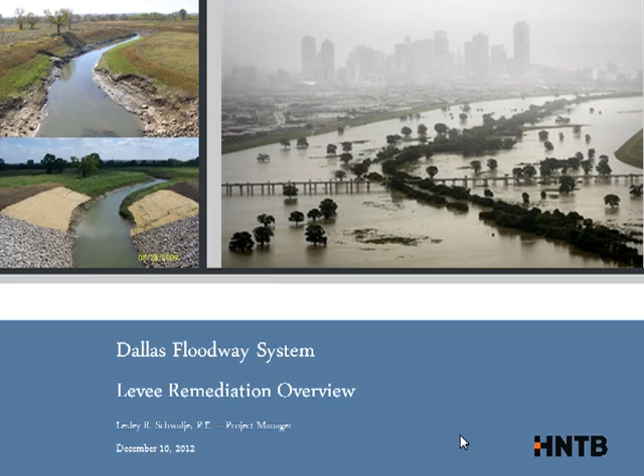I'm going to start out. I know a lot of you have probably seen or heard the city give presentations on their balanced vision plan and their Trinity River Corridor project, but I just want to give you guys a quick overview. There's a lot more to what's going on in the Trinity River than just the levee remediation.

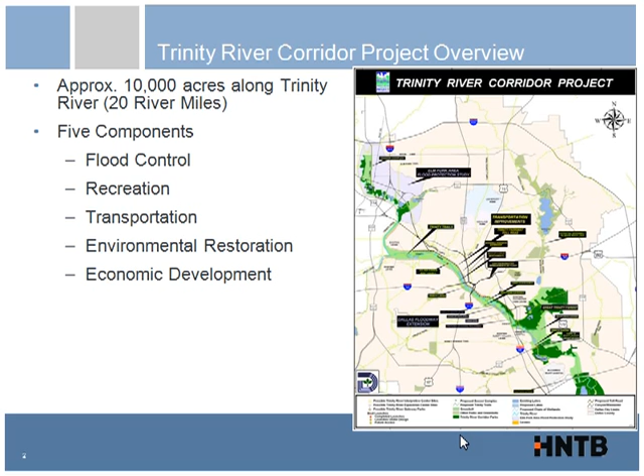The Trinity River project is broken into 5 components: flood control, recreation, transportation, environmental restoration, and economic development. I'm going to expand on those just a little bit.

Some of the projects that are going on that are related to flood control, as I'm here to talk about today, the 100-year remediation. And then I also just want to clarify, there's also what you're going to hear referred to as the Dallas Floodway Project, which is a joint project between the city and the Corps to look at these same levees, but they're looking at them to the full capacity of the system.

The levees are about 30 feet tall. The 100-year only goes about halfway up those levees. And so the Corps and the city are working together on an authorized project called the Dallas Floodway Project for that.

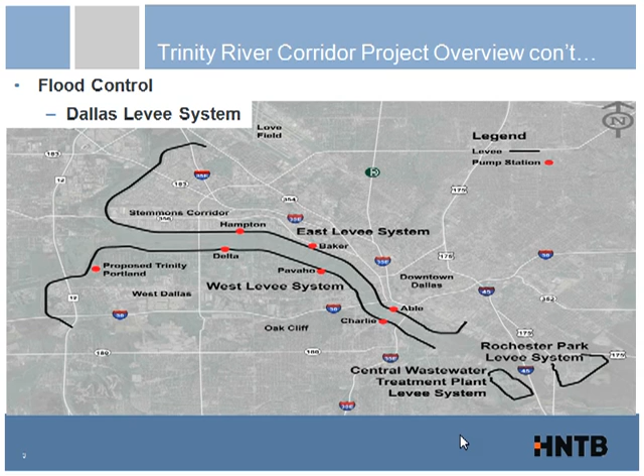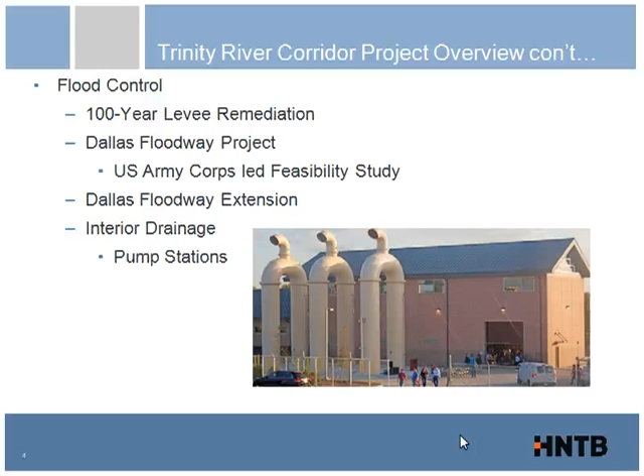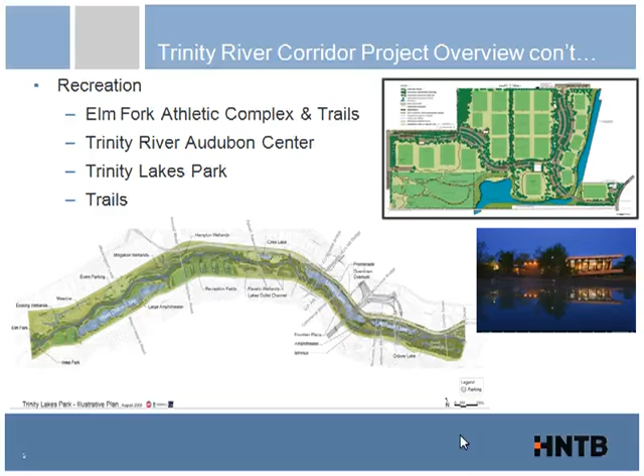The other components of the Trinity River project, I'm not going to get into nearly as much because flood control is what's near and dear to my heart. But you do have recreation. These are just some ongoing projects with lakes, trails, the Audubon Center, and things like that along and within the levees and the river.

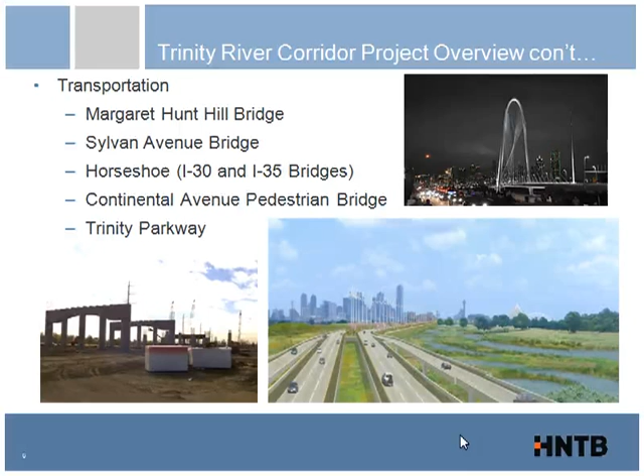I think a lot of you are familiar with the transportation projects. The Margaret Hunt Hill Bridge, which we all know is now open to traffic. There's also some ongoing construction on Sylvan, and then other projects that are in the planning stages for transportation functions within the river.

The last 2 pieces of the Trinity River Corridor project are environmental restoration and economic development. The environmental restoration includes the Trinity Forest, wetlands, things like that, that are being restored and improved within the system. And then, as with any improvement project, economic development is what we hope and are seeing coming following improvements that are being made to the system.

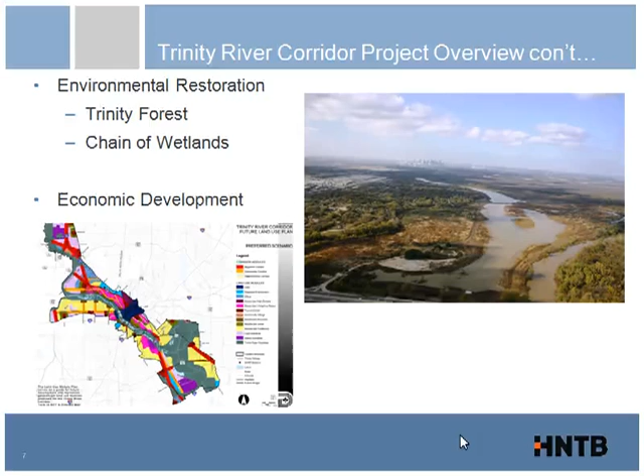So now jumping to the levees, which is where my heart is. I'm going to give you just a little bit of background on the levees and how we got here and where we are with the levee systems.

Back in 1908, the city of Dallas saw the worst flood they'd seen to that point, which is what initiated the building of levees in the city of Dallas in the first place. In 1908, there were no upstream reservoirs. When the rain came, the floodwaters came and just wound through the city, and there was a lot of destruction. So in the 1930s, the construction of the original levees began.

In addition to constructing levees, they also relocated the river channel to where you know it as being today. The river used to just wind up and down through downtown Dallas. Those levees were designed to withstand 2.5 times the capacity of the 1908 flood at that time in the 30s. In the 1950s, being completed by 1960, is when the Corps got involved with the levees.

There was a project in the 50s where they actually raised and strengthened the levee system to what we see out there today. At that time, the levees also became part of the federal flood protection system. The capacity at that time was approximately an 800-year storm event based on 1960 design.

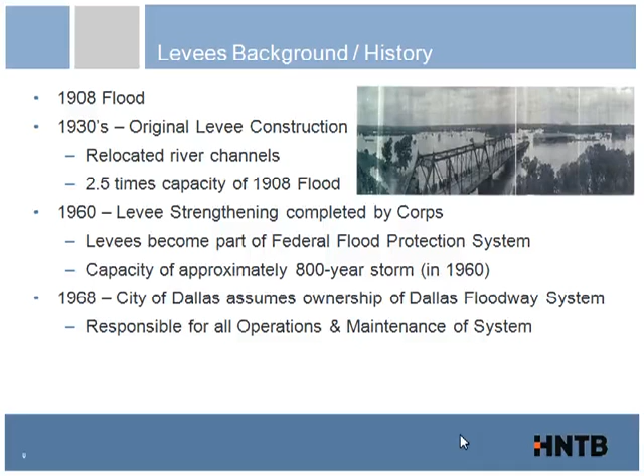In 1968, the city of Dallas assumed ownership of the Dallas floodway system, and what that really means is the city of Dallas took over the operations and maintenance of the levees. The levees were then, and are still today, part of the federal protection system, and the city does have federal assistance when it comes to their levees.

In 1990, some of you may remember this, before I was in the city of Dallas, but in 1990 the largest flood that the city has ever seen occurred. This actually surprises some people to know, this was actually only a 50-year storm event as it came through the Trinity River Channel.

The water peaked about 2 feet within the current 100-year water surface elevation, which is about halfway up the levee. So contrary to what some of the things we've heard, these levees have never been tested to the full height. There's never been water to the top of these levees. Just under halfway up is all the water we've ever seen on this system.

In 2007, Congress passed the Water Resources Development Act, which authorized federal participation in the Dallas Floodway Project. This created a partnership with the city and the Corps to improve the levees for flood risk management, but also to include the Balanced Vision Plan and have the Corps participate and approve the lakes, the trails, the parkway, things along those lines.

Then in December 2007, the Corps conducted periodic inspection number 9. Periodic inspections on levee systems all over the country are scheduled to happen every 5 years. They do an annual inspection every year, but the periodic inspection is a little bit more detailed.

Shortly before the periodic inspection in 2007, we're all aware of what happened in New Orleans with Hurricane Katrina. Following Hurricane Katrina, the Corps stepped back and took a look at the way they rate their levee systems, how they assess them with their periodic inspections, and developed standardized criteria and a template that all levees are measured against. The city of Dallas was lucky enough to be one of the first cities that had a periodic inspection done following Hurricane Katrina.

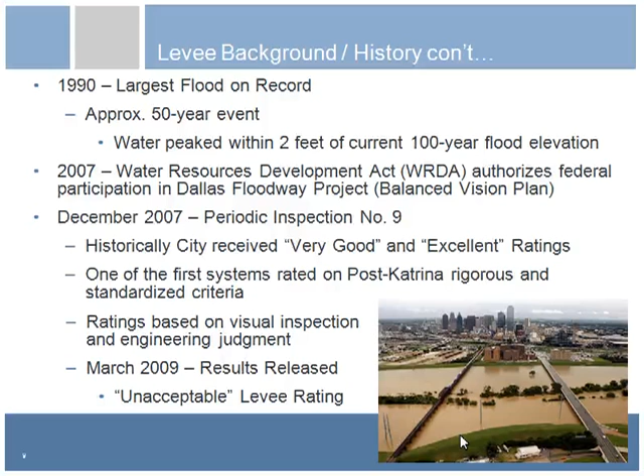So now, what does the unacceptable rating mean? The periodic inspection itself identified a list of deficiencies of things that were noted as being wrong or not up to standards with the levee system. Those deficiencies can be separated into two categories.

Operations and maintenance, which I mentioned before is the city's responsibility since 1968. These items included things like erosion of slopes, vegetation - we had trees growing too close to the levee system, structural damage such as a cracked facade on a pump station building, or concrete spalling at one of the head walls of an outfall channel, and then channel instability, which is similar to erosion, where at the outfall channels we had some eroding from the water coming through.

The other type of deficiency identified at that time were what we've been calling system design deficiencies, which are both the city and Corps responsibility. What they've done is roll all those deficiencies up into that Dallas Floodway Project, so those are being reviewed as part of the overall big picture of the levee system that the Corps and the city are currently actively engaged in looking at.

Things that fell into that category would be like levee height. Levees settle over time, so the levee was not up to the original design grade. Slope stability, where we're having levee slides, encroachments - and this was a big one for the city of Dallas because all of the bridges that cross the Trinity River are considered encroachments, some of which even the deck of the bridge is lower than your levee height. So they're really encroaching on the levee. And then under-seepage, which I'm going to get into a lot more later.

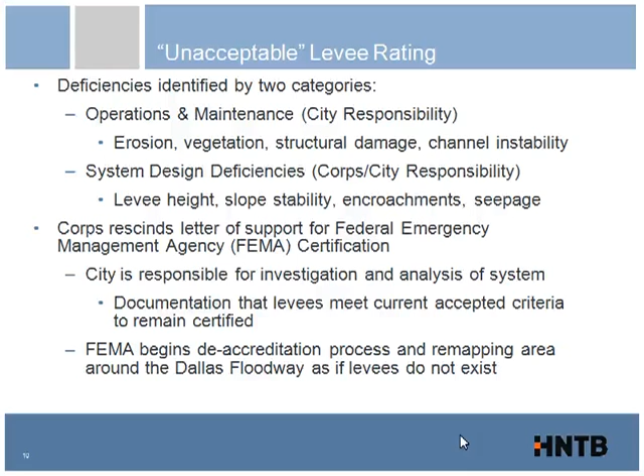And what they do when they do that is they start looking at remapping their floodplain insurance maps. In a case like this, which was happening all over the country, they're mapping the system as if the levees don't exist at all. And I have a map coming up that'll show you the repercussions of that.

Just to get into a little more detail, as soon as the city got their letter and knew that their levees were uncertified, they started working on what's called a maintenance deficiency correction period plan. What that does is take all those O&M deficiencies and essentially put together a plan, a schedule, a list of what they were going to do to resolve them. They worked with the Corps and got that approved in June 2009.

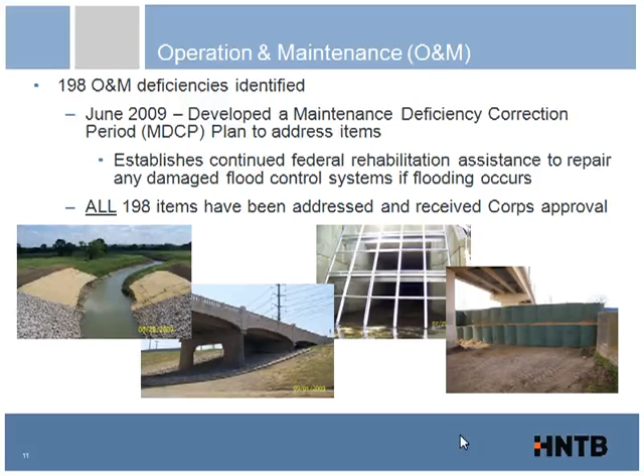What that meant was, while the city was trying to get everything resolved with their levees, if we'd had some sort of flood event and some sort of damage to one of the flood control structures, be it the levee or a pump station or whatnot, the Corps would still have come in and helped the city, despite their status of having an unacceptable levee, to repair as necessary. I also want to point out that since 2009, all of the 198 items have been addressed by the city and approved by the Corps, so the city is sitting in real good shape with that right now.

As far as the system design deficiencies, I don't want to spend much time on this - these are all rolling into that Corps feasibility study. In that study, the Corps is looking at not only what was identified as being wrong in periodic inspection number 9, but they're looking at any flood risk management improvements and then putting on top of that all of the plans the city has for the Trinity Lakes, the parks, the trails, and the parkway.

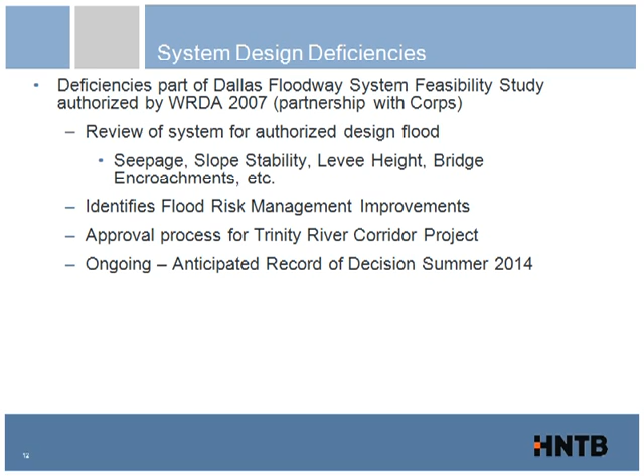When FEMA started their de-accreditation, it's actually supposed to be a 2-year process. What has happened since then is the city of Dallas was not the only municipality in the country in this position. A lot of levee systems were being rated unacceptable, and a lot of them weren't nearly as proactive as the city of Dallas and could not have resolved this.

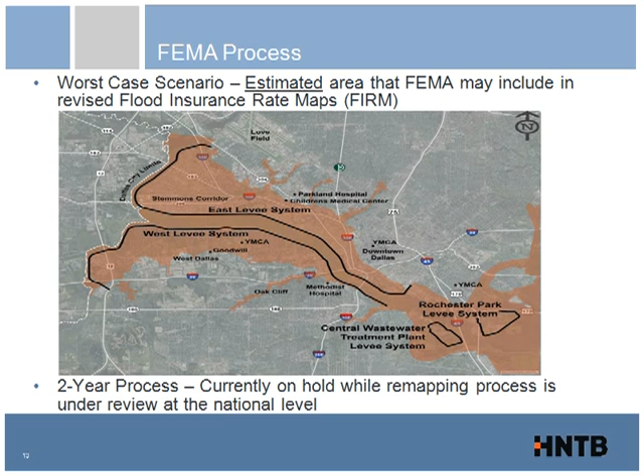So they went to Congress, and FEMA and Congress are working together on a new remapping process, because just taking the 11-mile east levee and saying the whole thing doesn't exist because of one flaw just isn't feasible. So FEMA's looking at their whole remapping process, and that is currently going on at the national level. FEMA is on hold right now as far as redrawing the maps, even within the city of Dallas.

So what did that mean to the city? Back in 2009, they immediately started investigating and trying to determine what actually needed to be done with their levees.

So the first thing we did was start with a massive soil investigation, which included looking at all the historic and recent borings, the parkway, the pump stations, all the bridges crossing. They'd all done a massive amount of soil investigation, and then HNTB supplemented it with additional borings where we felt we needed additional information. In the end, we actually ended up with almost 4,000 borings and cone penetrometer tests.

I'm not a geotech, so I'm not going to get into that, but it gave us detailed information about the soil on the system. It was 30 miles of levees that were looked at in that detail.

We also started looking at historic information, as-built drawings. As I said, these levees were originally constructed in the 20s and 30s. There's not a whole lot of as-built information on them, but we did have some information from the Corps improvements in the 60s, as well as on the pump stations and whatnot that were built.

We also did a very detailed investigation into the utilities. Some people would be surprised to hear there are more than 100 utilities that actually cross those levees out there, and a lot of them predate the levee construction itself, so there was not much information known. In some cases we were drilling our soil borings blind, not sure if we were in the vicinity of a utility or not. So there was a lot that went into that.

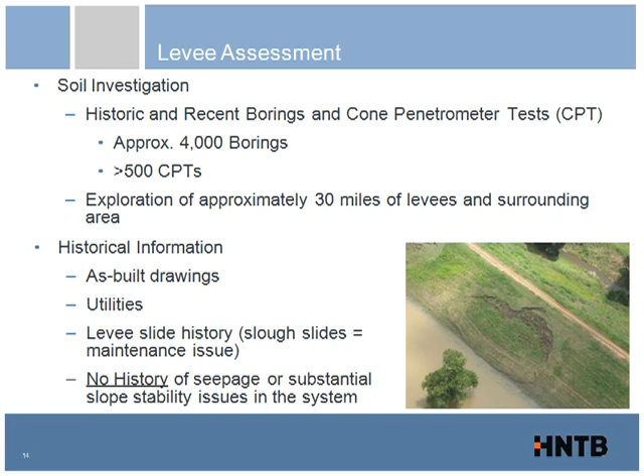I do want to point out that through all of our investigation, and everyone talking to people that we know have been here for a long time, there is actually no history of any seepage or substantial slope stability issues within the system, even during the 1990 flood. Historically, these levees have performed very, very well.

So, as we started gathering information, the first thing was to take a look at what potential problems we thought we saw out there. We started that very early in the process, so even before we'd done all the soil information and investigation, we took a look at the worst possible case of problems we could have out there—all the situations we had based on what we knew at that time.

That in turn went into what we called a levee remediation plan, where we identified potential remediation measures for all of those potential problems. Doing it that early gave the city, the Corps, and HNTB a good start on getting together to start talking through what remediation measures different groups would like to see.

What do we think the right path to head down as we get more information is going to be? Since those reports were developed about 2 years ago, we've been constantly getting additional information, all those borings, a hard ground survey, real good information about the system, and we've been refining the problem identification and the levee remediation.

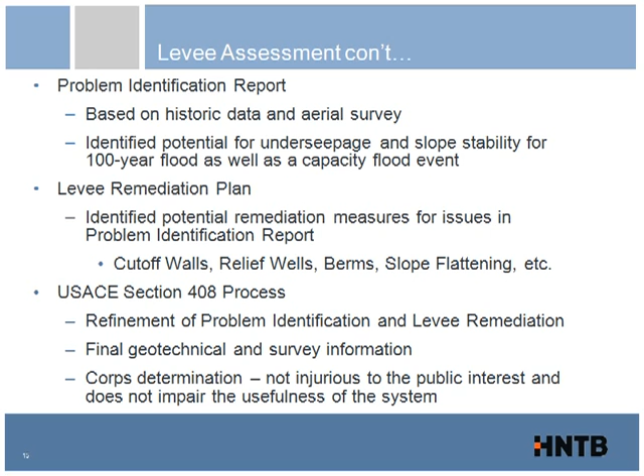Through that, the ultimate goal was to prepare a Section 408 proposal for the Corps. That's essentially putting together all the technical data in a report form, with a list of requirements, because ultimately what you're looking for on a federal system is a Corps determination that you can do construction or make improvements to your system without being injurious to the public interest and not impairing the usefulness of the system. So basically you're not sacrificing the flood control and not doing anything to harm the system that's out there today. We did get approval earlier this spring on our ultimate 408 package for the levee remediation.

What we determined through all that refinement was that we had about 3.5 miles of areas where there could be potential seepage issues at some point with a 100-year flood.

If you're not familiar with what I mean by seepage, hopefully you can see it on that cross-section. Essentially, we've got some potential sand layers down underneath the levee, and if you get enough water up there on your flood, you could create a path where the seepage could come through under the levee and blow out on the land side and create a problem. I'm oversimplifying it - all the geotechs in the room are probably cringing - but that's it in a nutshell.

You can see on the map the 3.5 miles of area that we were concerned about. There's about 3 miles on the upper east levee, and then there's a real small portion down at the south end of the west levee.

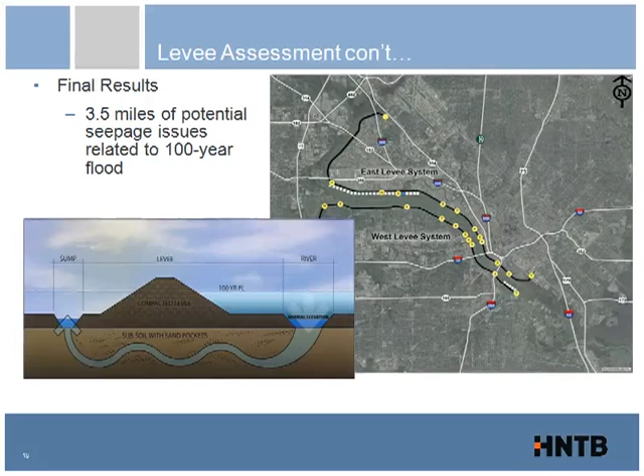Now I'm going to step back for just a minute, because some of you have heard recently in the news about the risk assessment that was done for the system, and that these levees may not be in as bad of shape as we originally thought, and that we can move forward.

The Corps did do a risk assessment as part of the Dallas floodway feasibility study. The Corps led it, the city participated. In the risk assessment, you're really looking at analyzing failure scenarios based on probability, not a black and white answer. So you're looking at it based on probability of the failure occurring and what those consequences are. Life safety is first and foremost in everyone's mind, so what are the consequences if we were to let something happen?

The results of that led to a couple of different things. First and foremost, it gave everyone a better understanding of the flood types that we experience. A lot of geotech modeling treats the water as if it's up there forever, but we learned through some of the modeling that's not realistic for what's going on here in Dallas. So they looked at shorter duration floods.

The other thing they really learned was that the levees are more resilient than originally evaluated. The opinion now of the levees is that they're a lot stronger than we thought at the end of periodic inspection number 9.

What you'll find with this risk assessment, and with most levee systems out there, is that your highest risk of failure is almost always going to be overtopping. It doesn't matter how high you build your levee, it could always be overtopped by some massive flood. This Corps has been updating hydraulic models through this process, in part because since these levees were originally built, they've built a lot of dams and reservoirs upstream, so they've been revising the modeling to incorporate some of that.

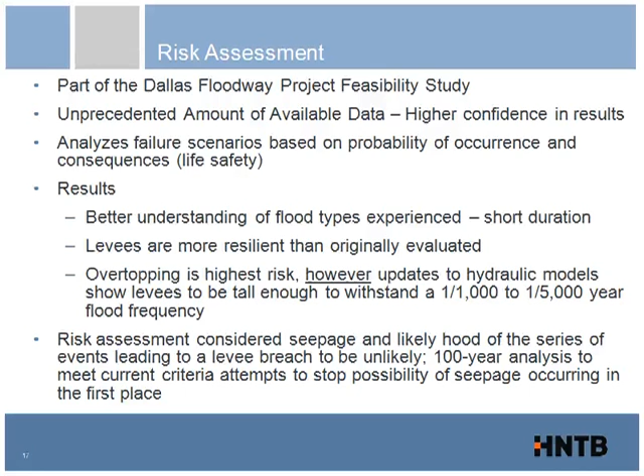Well, for the 100-year analysis and what we were required to do for FEMA, we had to stop that seepage from happening in the first place, because we have to be able to show on paper that there is no seepage issue out there, regardless of the chances of it actually leading to failure or a levee blowout or the consequences. Anyway, that's my side note.

Back to construction. What we ended up with through our coordination with the city and the Corps was that the best remediation for that 3.5 miles of under seepage was a cutoff wall.

Now, the cutoff walls that we chose to put in, we used a mix of soil bentonite and cement bentonite walls. I don't want to get too much into the difference between the two. Just the cement bentonite, you introduce cement instead of the native soil when you're mixing it in with bentonite. We specifically used cement bentonite on this project because we had to cross both of the Hampton outfall channels, and the cement bentonite sets up a lot quicker.

It's harder to construct, but it sets up a lot quicker, and that way we were able to quickly reopen the Hampton outfall channels in the event that we had a flood and they had to use the pump stations. We also used jet grout in select locations. I'll explain jet grout a little bit more later, but that was mostly to address utility crossings and construction under the bridges where we didn't have the clearance.

The cost of construction came in at approximately $10 million for that 3.5 miles, and construction did begin earlier this year in June and is ongoing. We anticipate it wrapping up here in the next month or so.

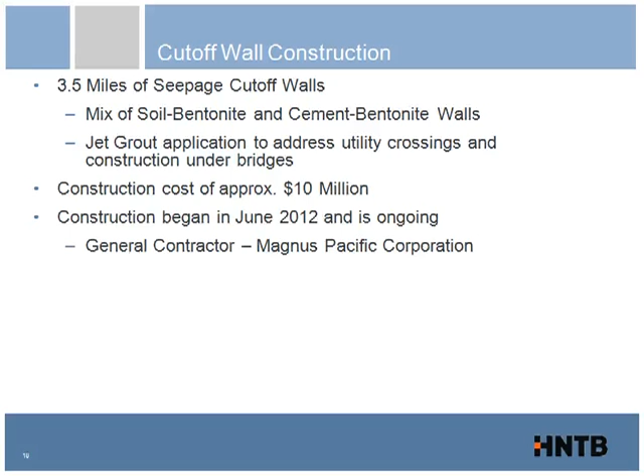Once the cutoff wall's in place, they put a clay cap up here at the top, and if you were to go out there, you could see it today because it's still an active construction site, but 6 months from now, you're not even going to know where those cutoff walls are. They're underground. The grass will be restored above them. We'll have markers out there, obviously, so flood control knows where they are, but they're completely underground and have no impact to the floodplain itself.

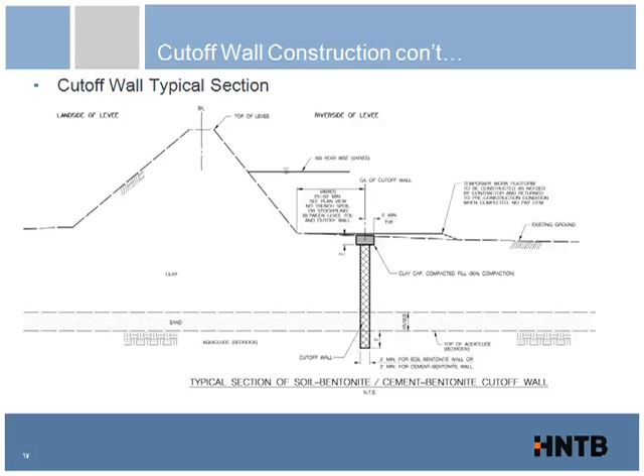All right, now I have some fun construction pictures that I'm going to try to explain.

This is the slurry bentonite pond that the contractor put in. The contractor did most of his staging near the Hampton pump station, which you can kind of see in the background. What they start with is this big slurry pond, essentially water pulled out of the city hydrants mixed with bentonite. They mix it to get the right mix design, testing every day, multiple times, for pH, viscosity, and most importantly, unit weight.

Once they've got the slurry as they want it in the pond, they start piping it up and over the levee, and in some cases up to 3 miles. You can kind of see a pipe right here. They had to pipe it along the toe of the levee to get it to where they were actually digging the cutoff wall.

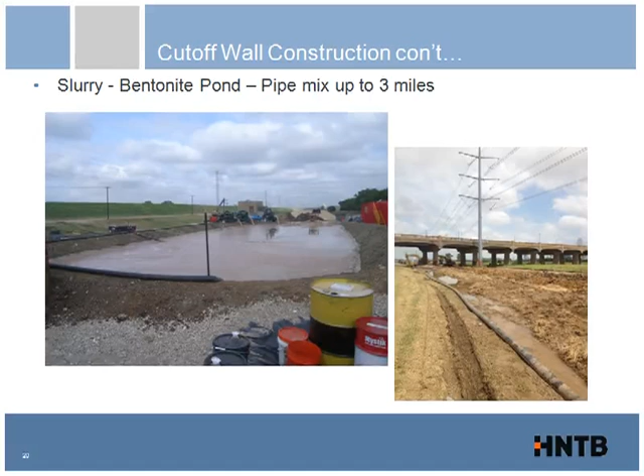Excavation of the cutoff wall takes some pretty big equipment. This is a long reach track hoe that can actually dig up to 84 feet deep, a trench 3 feet wide. In our application, we only needed to go up to 60 feet deep, so we had plenty of excess.

This is a picture of the bucket, and there's some teeth on that bucket, because like I pointed out on that typical section, you actually have to get your cutoff wall down into bedrock so that you're sure you cut off that sand layer. So they use those teeth to dig out the shale and chalk materials that are under the sand to make sure that they hit that depth.

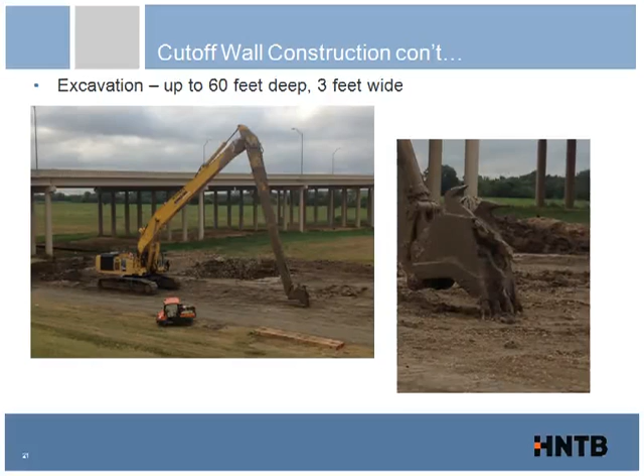This is the actual trench construction, and as you can see on the right, it's just a narrow trench up to 60 feet deep. Part of the reason it was so critical that they're testing that slurry multiple times daily for its unit weight and density is because that slurry is holding that trench open all the way down to depth.

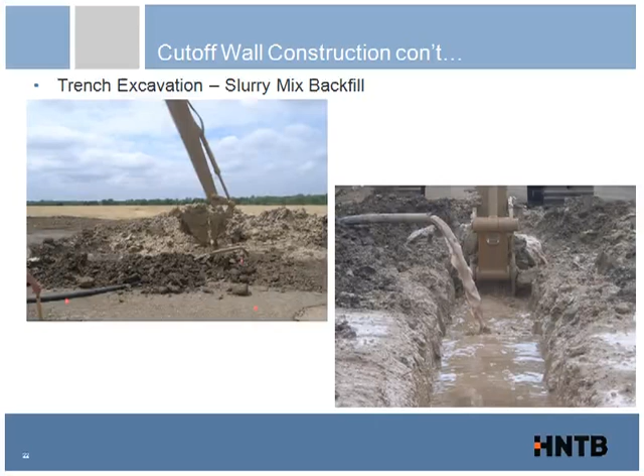So what they're doing is they're digging that out, keying into the material, dumping the material that comes out of the trench over on one side, and then backfilling with the slurry. So then you've got an open trench with slurry in it.

Then, with that material pushed over to the side, in this case a bulldozer is working the soil that came out of the trench in with the watery slurry mix, farming it there next to the trench until they reach the density, not pH, but the permeability, the slump, the consistency that they need.

So they'll work that off to the side of the trench, and then they literally just push it back in. The key is the density of that backfill slurry actually has to be more than the slurry in the trench, so it'll displace it. They're just pushing that material back in and replacing it, and that's how the slurry wall is essentially created. Now, obviously, this is not an exact science.

That's why we put into our specifications some pretty hard requirements on the contractor, because it's really an art, and they need to know what they're doing. Our contractor was required to have a certain number of years of experience doing exactly this kind of work, because you're out there working with that material. It's hard to control—it's not that controlled environment that I know we all like to see.

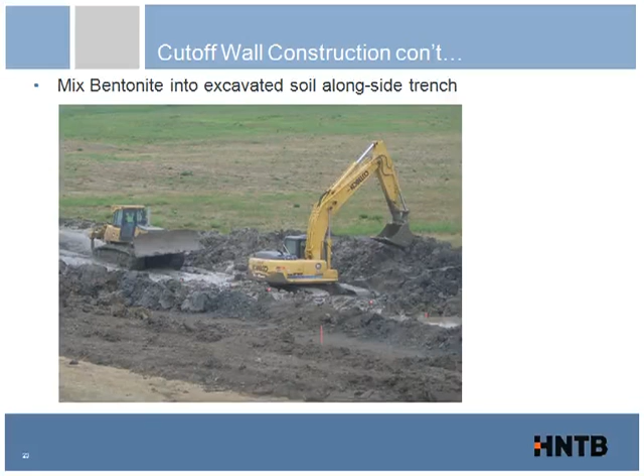In addition to the slurry wall construction, we did some jet grouting around utilities and whatnot. The jet grouting is essentially a drill rig converted so it can also pump grout. They drill the hole down to the key depth, and then as they're coming up, they're pumping it full of grout, which displaces the native materials and creates these columns you can see in this middle picture and this bottom picture—columns that overlap and essentially create a wall.

The reason you do this, especially around utilities, is that we have so many utilities out there crossing, and with that long reach track hoe, you don't want to be digging around your utilities, and the utility company doesn't want you digging around their utilities either. So you use this jet grout and angle your drilling down around it, so you can miss the utilities, because the critical piece you're trying to cut off is down in that sand layer. You're not really concerned that you didn't get jet grout right up next to your utility, because you don't need it, since the clay is not permeable.

So what you're seeing in these pictures is we did a couple of test sections just to make sure the jet grout was overlapping and creating what we wanted it to. And you're seeing the excavation of those test sections there.

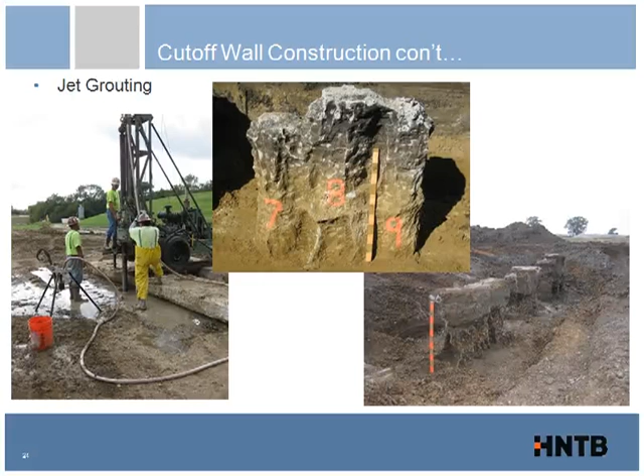Now for the next steps of what we've got going on. As soon as construction wraps up, hopefully in a month or two, we'll be pulling together the construction as-built, which is essentially the last piece of the package we need to prepare the FEMA certification package. Once we have all those technical pieces that FEMA requires pulled together, we believe we're on track to submit the final FEMA package in the spring of 2013. And as I mentioned earlier, with them on hold, we're well in advance of any remapping of the levee systems.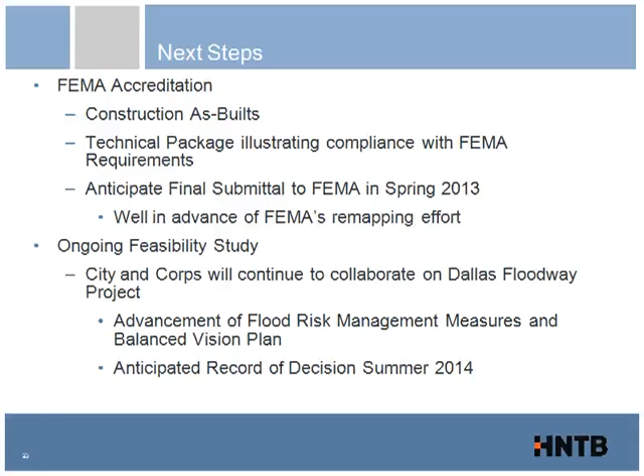I just wanted to mention, ongoing, you're also going to continue to hear about the Dallas levees with the feasibility study, while the city and the Corps continue to collaborate on what the ultimate picture of what they're going to build is going to be with flood risk management and the balanced vision plan. We expect the record of decision on that in the summer of 2014.

With that, that is what I've got. So if there's any questions or if I can answer anything.

The cost of the cutoff wall was $10 million for construction. I believe that the money came from... I actually know the answer to this, but I can't think of it. I think it came from, they pulled some money from some of the other pump stations and other flood control projects that they had planned for the future, which were, I believe, in the 2006 bond program.

Will HNTB be certifying the levee? Sort of. HNTB will be sealing the technical package that we give to the city. We'll seal the package saying it meets what was required by FEMA. We're sealing our analysis, our work, and then the city, I believe it's going to be the assistant city manager, or the city manager, will actually seal the overall package that is submitted to FEMA. So, yes and no.

About how many utility or conduit crossings were there in the 3.5 miles? And about what was the oldest or most critical one of those? The jet fuel line that runs to Love Field was the most critical.